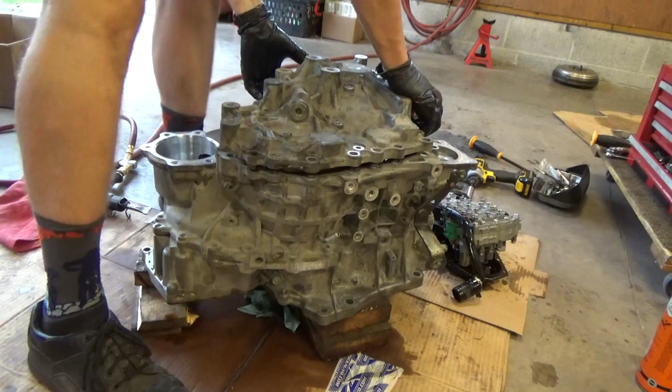That dowel is stubborn. Okay, should be in good shape. Now you'll probably lose some pieces, but don't really care, right?

Ho ho ho. That is freaking cool. This is what we came to see. That is freaking amazing. So it's not just a couple steel belts, it's a lot of them.

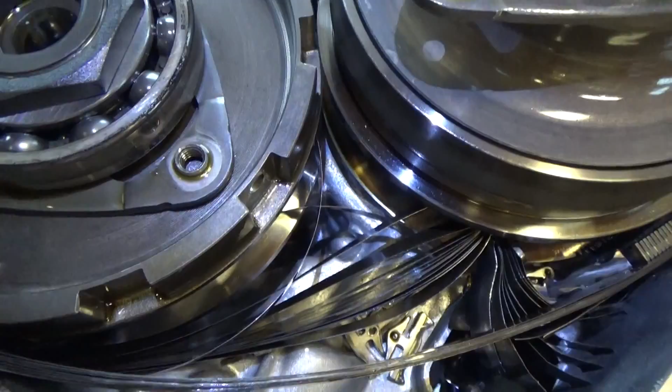So the screws that were in there actually, like I thought, were bearing retainers. These big roller bearings. They're just kind of plates.

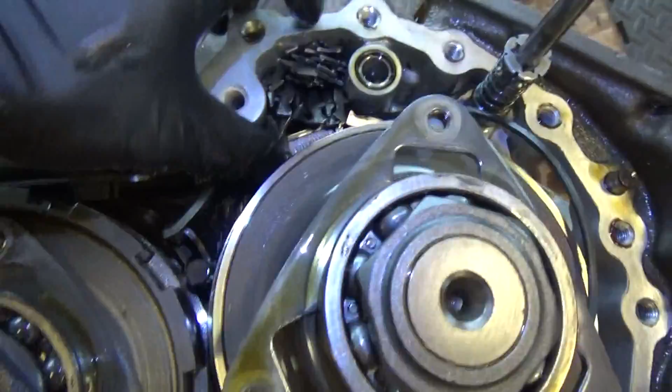We'll take this out. I wonder what this is, some kind of plastic piece. But wow, that sheared clean off right there.

I'm wondering if we clean everything out, if we can put a new belt on here, salvage this thing. Wouldn't that be pretty awesome? Now what I want to explore is the actual mechanism that varies these ratios. That would be really, really awesome to understand how this thing works.

Alright, time for some analysis here. First of all, I can't believe this thing made it 186,000 miles. All that torque is transmitted through these steel belts with these little segments sandwiched in between them. That is some really crazy engineering that they can make this thing actually work. I'm impressed, you know, you can't say that it's poor engineering. I mean, it did blow up, but the fact that it did go that far, yeah, that's impressive.

Now if you were towing a trailer with this or doing something heavy duty, I don't know, I would not trust this contraption. Or doing like a long cross-country trip into the middle of nowhere, towing a trailer up the Rocky Mountains or something.

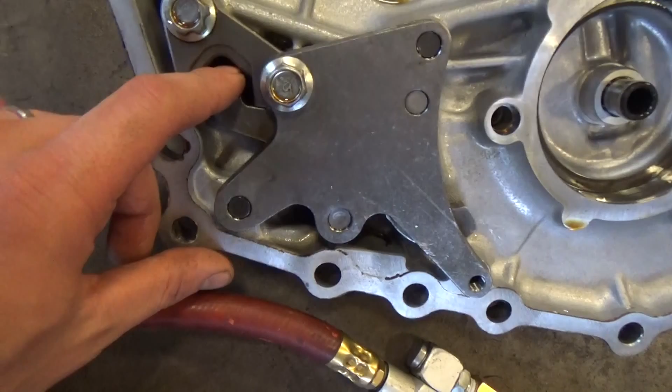So first, what is this thing? So when you put the vehicle in park, this comes all the way up. Now what does it push on? It pushes on this guy right here, kind of goes in here, and that extends this little pawl. And that engages into one of these teeth.

And this secondary pulley is actually directly attached to the final drive. And it's jamming up because the belt's freaking destroyed. So it looks like there's a direct connection between the secondary pulley and the final drive. So when that pawl engages, you're in park and the vehicle won't move. So that is our park pawl engagement mechanism. So we got that out of the way.

Now, how do these gear ratios vary? That's the heart of the CVT transmission. So maybe I'll clean up this mess a little bit here, and then we'll see how the heck these pulleys actually vary the gear ratio.

So now that we see the carnage in here, the question arises: was it the belt that failed? Well, obviously it failed, but did it fail just from wear and tear and fatigue, or did something actually cause it to fail? And to answer that question, we need to see how this transmission works, how the gear ratios vary, and what other failure could potentially cause this belt to get overstressed or stretched.

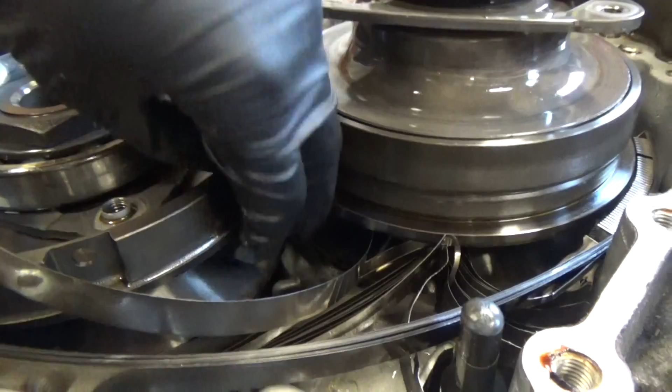You can actually tell a surprising amount about a system just by looking at it, observing it. So what do we see right here? We see these two pulleys, the primary pulley and the secondary pulley, and the belt rides in these grooves, kind of like double cones opposed. So these concentric pulleys, right?

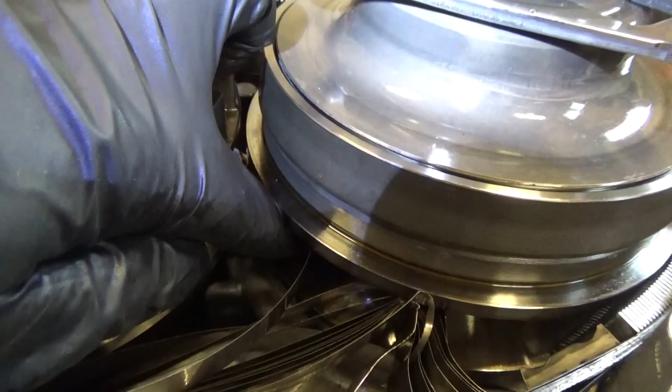For the gear ratio to vary - we'll draw this up on the whiteboard - but the belt has to ride either further in on the primary pulley or further in on the secondary pulley. And how do we get the belt to go further in? Well, these pulleys actually change the distance between these cones. So then it lets the belt slip further in, and at the same time the other pulley has to close the gap between the cones so the belt rides further out.

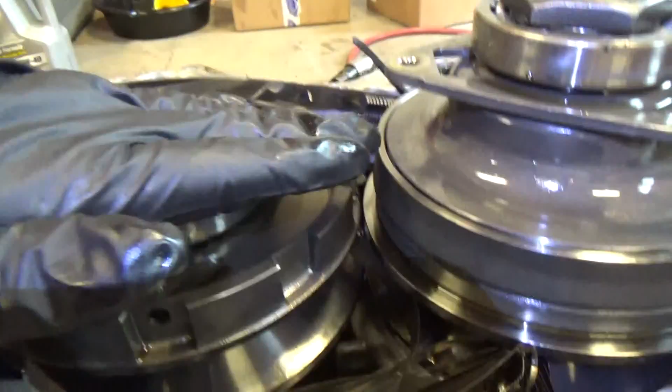So it looks like, for example, on the secondary pulley, this part is stationary with respect to the surface. However, the bottom part is the one that moves up and down. On the primary pulley, it's the opposite - I think the bottom surface stays stationary with respect to the transmission case, and this upper part moves in and out. Now, the reason I ask if one of the pulleys failed and caused the belt to rip, is because right here you see another part of carnage.

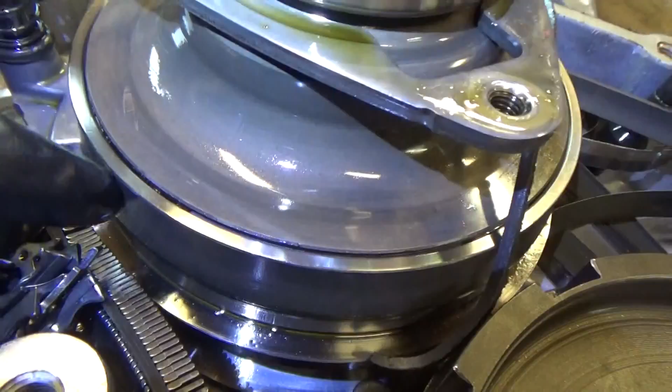What the heck is this thing? Well, if you look close, inside the gap right here, you can see the leftovers of this guy in between the drum and the, I don't know what you want to call it, the outside and the inside. So that is supposed to be a seal all the way around. And right there it stops, so apparently this seal just got blown out when this pulley collapsed.

Now, did it collapse because the belt ripped first? Or did the collapsing pulley overstretch the belt and cause the belt to rip? That, I'm afraid, we can't really answer.

All I know is that it's not just the belt that failed, it's also the seal that got destroyed. And the material of the seal, I don't know if it's supposed to be pliable rubber, but this feels really stiff. And if you bend it, it'll probably crack.

So, my question is, did the seal just get hardened over time from heat and lost its pliability and then just failed? The pressure got lost, the pulley collapsed, that pinched the belt and stretched it out and just ripped it. So it could be a failure of the pulley causing the belt to rip, or the belt ripping first, causing the pulley to collapse and blowing the seal. So what came first, the chicken or the egg?

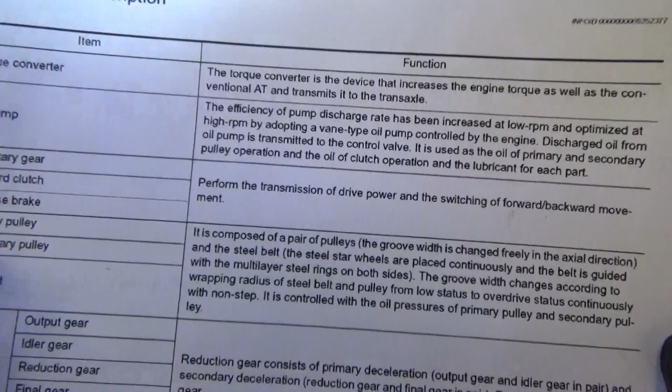So from all data in this component description, if we look at primary pulley, secondary pulley, steel belt, so read that little paragraph: composed of a pair of pulleys, the groove width is changed freely in the axial direction, and the steel belt, the steel star wheels are placed continuously, and the belt is guided with the multi-layer steel rings on both sides. Those are the bands that snapped.

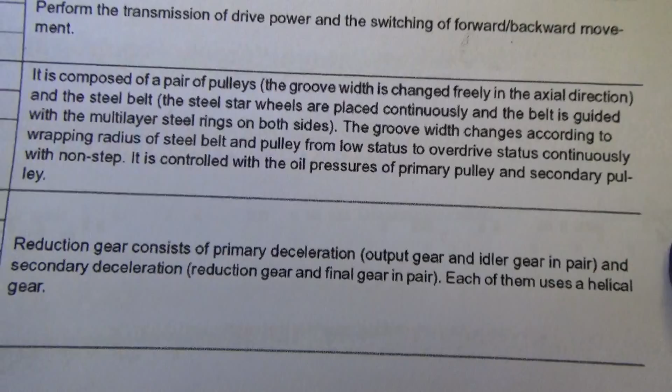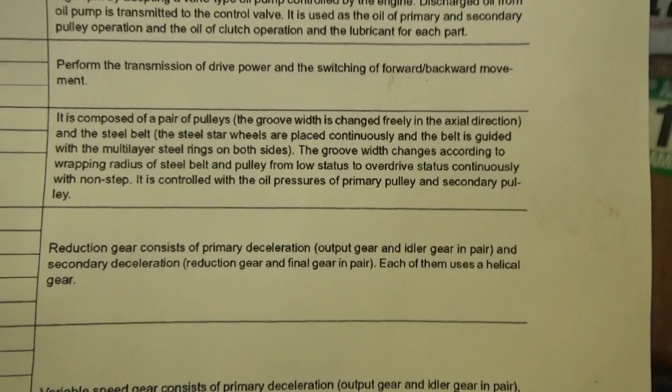The groove width changes according to wrapping radius of the steel belt and pulley from the low status to overdrive status, continuously with non-step. It is controlled with the oil pressures of primary pulley and secondary pulley. So, oil pressures are key here. So let's drop a little schematic on the whiteboard.

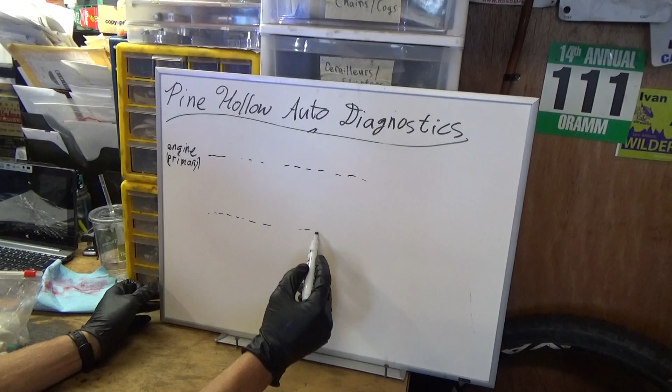So the principle here, we have two axes, primary and secondary. So let's just draw a dotted line. So this is going to be engine speed, or primary. And then our second axis is to the wheels, and this is secondary.

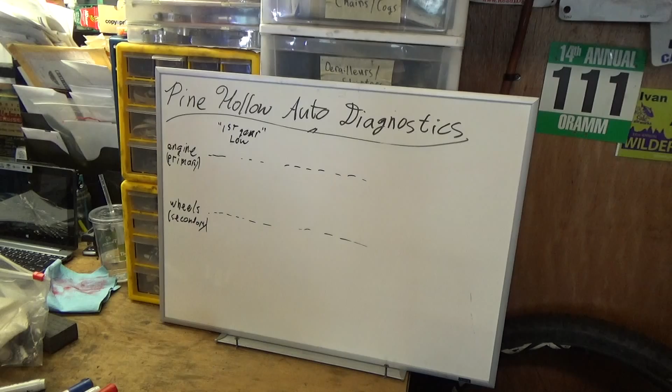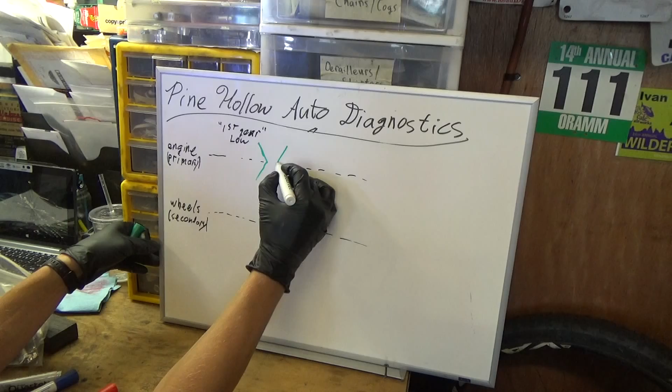So first let's draw the configuration for when you're just accelerating, this is like first gear, so low ratio. So in first gear, what happens? The engine spins fast and the wheels spin slow. And if you think about a bicycle, the pulley in the front is going to be small and the pulley in the back is going to be large to get that really low gear ratio. So the cone in the front is a small gear, right? So this cone is going to be spread out, and the cone in the back, again we need to line up our center marks, is going to be squeezed in.

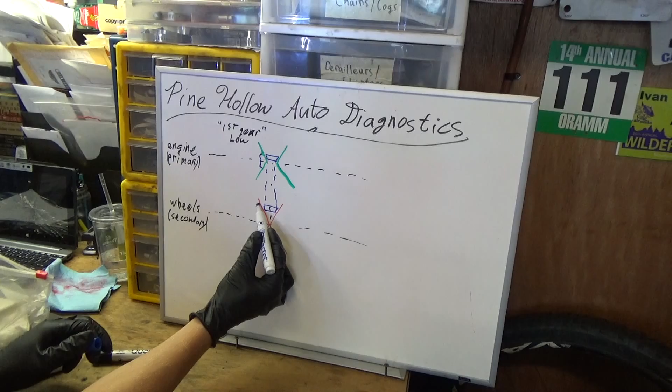Right? So then the belt, let's say the belt has this shape. If you bring that shape down here, it's actually going to ride up high on the secondary pulley. You see that? So the actual diameter on the primary side will be small, and the diameter on the secondary side will be large. So that's our first gear, or low gear.

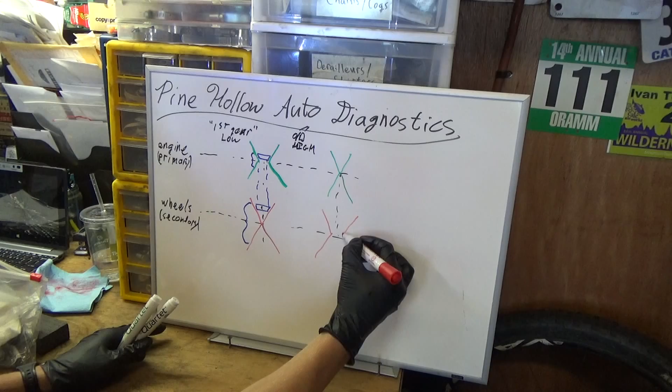Now as this CVT does its thing and these cones move in and out, once we get to high gear, so this is like overdrive or high, the primary pulley actually gets squeezed in, and keep drawing this line down here, our secondary pulley is actually going to come out. So now our belt will look something like this. It'll ride high on the primary side, and it'll be way down here on the secondary side.

So you can see that this distance got big and this distance got small. That's your high gear ratio. The engine's spinning here, and for every engine revolution you'll get a lot more secondary pulley revolutions, and your wheels will go faster for the same engine speed. So I think that's pretty neat.

The question is, if a pulley did collapse, which one was it? And since only one side moves, are these pulleys aligned at the moment?

So as we saw on our transmission, this side of the secondary pulley is fixed, just draw it as a triangle, and this side of the primary pulley is fixed.

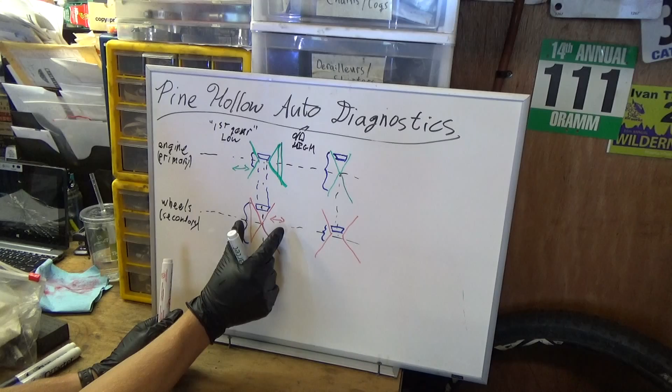So that means this guy can go in and out, and this guy on this side can go in and out. And keep in mind, the belt always has to maintain this straight direction. If this pulley gets squeezed in at the same time this pulley gets squeezed in, you're in big trouble. Because A, the belt will get stretched, and B, it'll actually get misaligned.

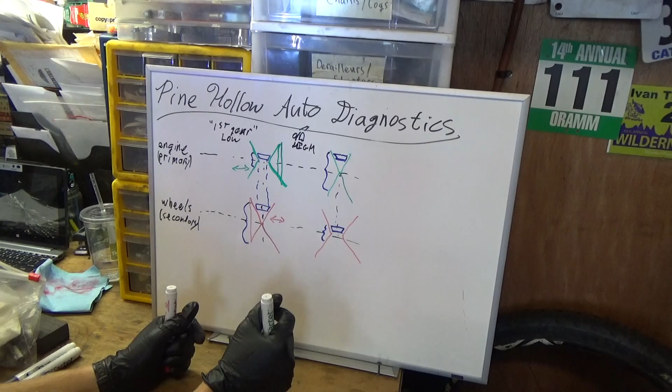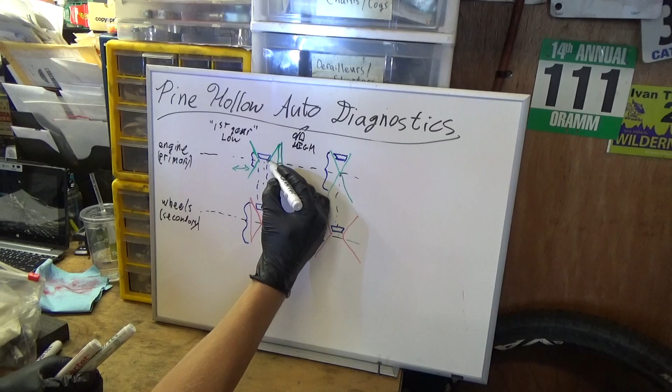So imagine this guy going in here and this guy going in here. That means our center line will now be from here to here, which is crooked.

So it's kind of a geometry puzzle how these pulleys work, but it seems like they're very sensitive to oil pressures. When this one closes in, this one has to come out at the same time. Otherwise, this transmission is just going to blow. So it's very, very sensitive.

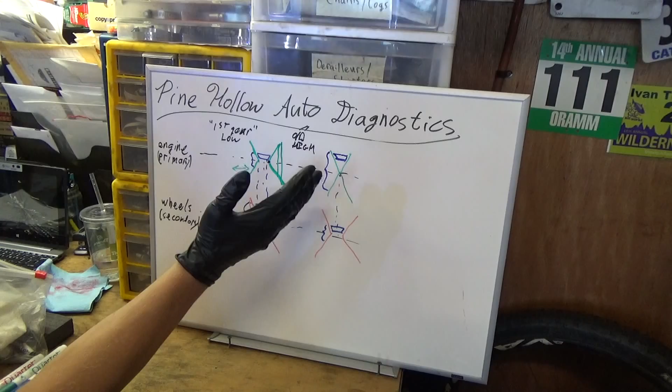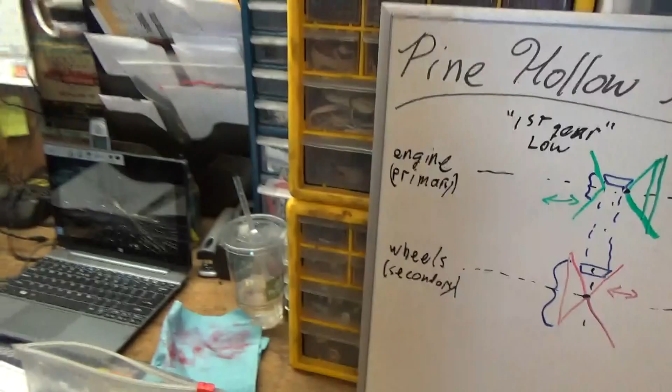Now the question is, did one of the seals fail and the pulley collapsed and just snapped the belt? Or did the snapping belt cause no feedback force when the pulley collapsed and blew the seal out? That we can't really answer, but at least we have a pretty good understanding of what it takes to vary these gears using just oil pressure on the sides of these conical pulleys.

So the next thing I want to do here is get the remains of this belt off and actually try to lift this big pulley out and explore how the cones move with respect to each other. Where the pressure is applied, what the default position is. Because right now, the pulleys, you can see, they're misaligned and the distance is equal between them, meaning they're both closed. Now I don't know if that's what they do normally or if that's part of the failure.

Quick little experiment. I got a pry bar in here against the remains of the belt. I'm trying to push the little segments back into the pulley, and check out what happens when I do that. When I push them in, come on.

The pulley actually expands and you can see oil coming out of that hole. And then I let it go, oil goes back in. So that bottom part of the pulley is going in and out.

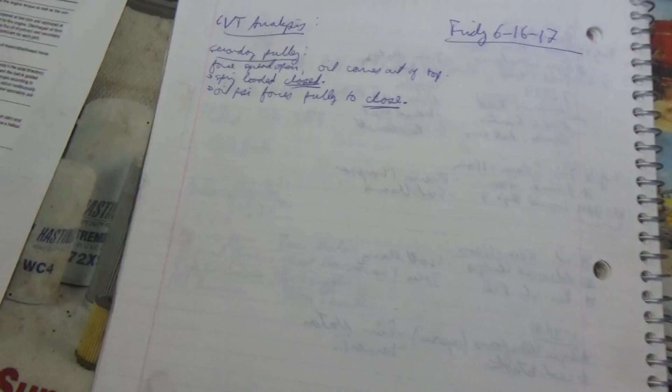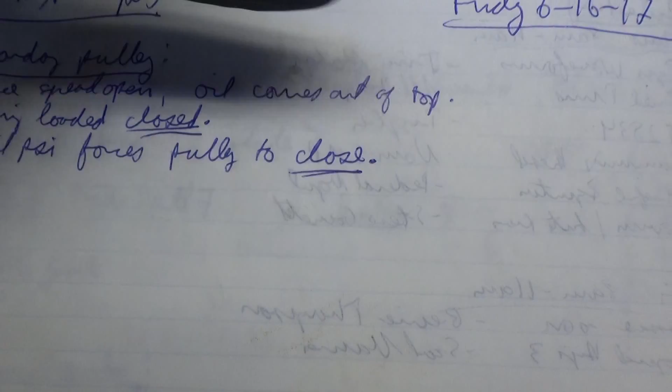So personally, I find this the most exciting part of any teardown is to actually figure out how the dang thing works. So in the secondary pulley, just taking some notes, when we force spread it open, oil comes out of the top. So it is spring loaded closed, and the oil pressure forces the pulley to close.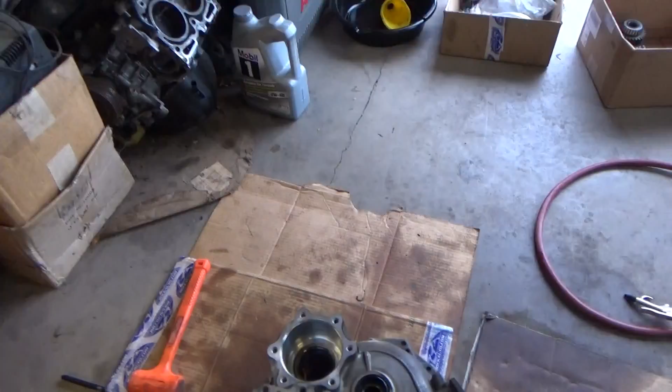If that makes sense. So this pulley is always pinching the belt tight under spring pressure. However, oil pressure actually forces it tighter to clamp the belt, and so there's no slip between the pulley and the belt. And assuming that this is the oil port for that drum, looking at our cover...

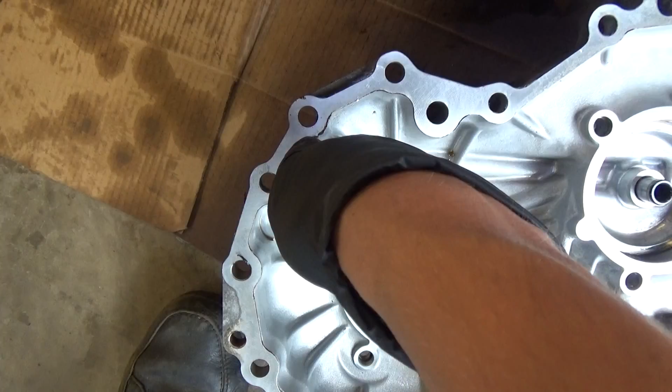You can see that this oil pressure port right here corresponds to this hole over here. And if we blow some compressed air into here, it comes out exactly out of this dowel to pressurize our secondary pulley.

That's really cool. So now we can see how the secondary pulley is controlled with oil pressure, and the primary pulley, I think it's the exact same principle, but it's controlled from the back side. And right now it's spring loaded closed, so this drum where the seal is actually rises up towards the bearing.

And you can actually see that there's a kind of like a little guide, but I think it's not a guide, it's more of a sensing rod that comes down here, and you see that pin moves up and down.

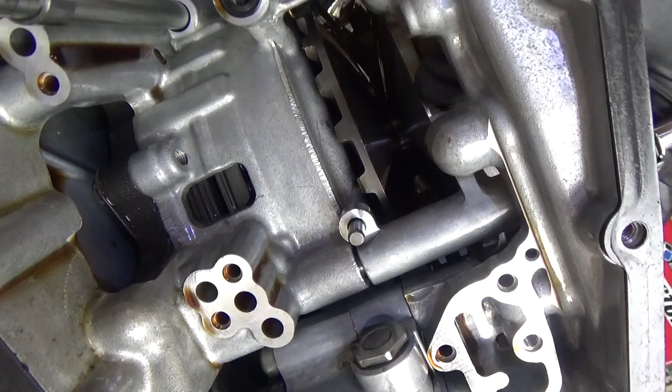So right now it's in the fully down, pinched closed position, but as that pulley diameter, the distance between the cones grows, this guy lifts up, and that corresponds to a little thing in the valve body.

Right in here, I think that pin goes right in here in this little arm, and that, again, we don't know the exact details, but there's an oil control valve here and an electric motor that retracts or extends this little arm.

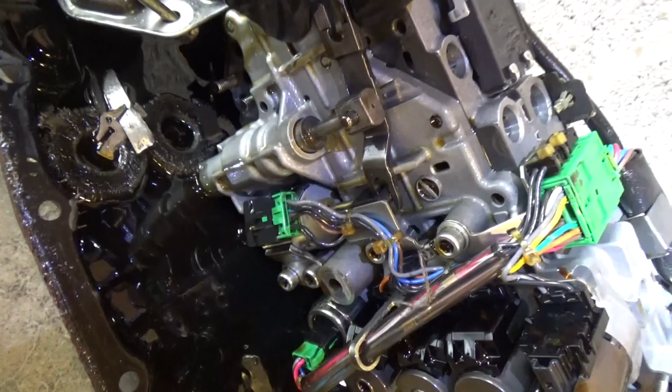So it has to account for all the variables. Where the primary pulley is, that probably feeds back to the secondary pulley to make sure it's synchronized.

And the motor, that might be the actual shift motor, to control the gear ratios. It's all like a mechanical feedback system, and obviously with electronic control. So this thing, on paper the concept's pretty simple, but the execution requires a lot of very precise engineering and control.

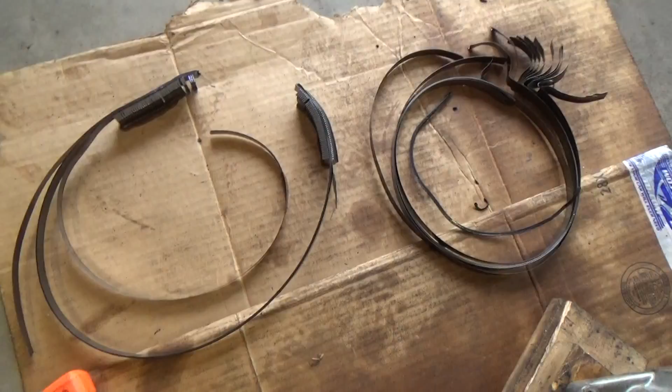So what I want to do is get these kibbles and bits out of here, and at least pull one of these pulleys and kind of see how it works. So it looks like in these CVTs, the most catastrophic thing that can happen is indeed this steel belt breaking. There's the remains of the two bands, or two sets of bands I should say. There's still some segments on those, and my magnet tray is overflowing with bits of steel belt. Now let's try pulling the secondary pulley out.

Oh my word. So there's that. Wow. Let me get some more bits out, and we can actually see what's going on in here. This is kind of fun, you're going fishing for kibbles and bits.

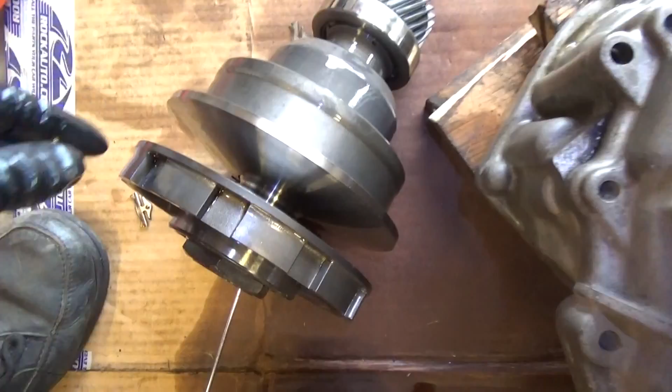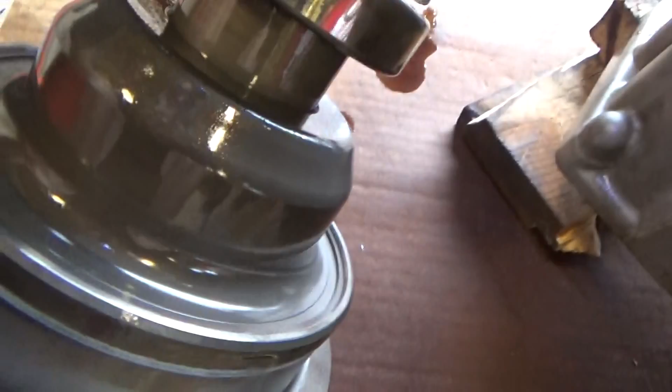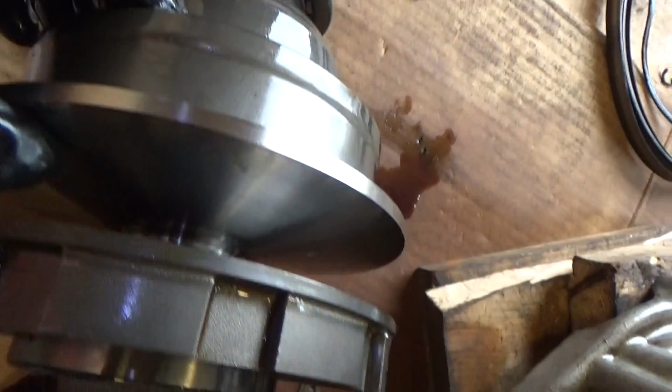And this secondary pulley is directly attached to this pinion gear, so that there's no other bearings in here. And aha, check this out, there's actually a snap ring holding this drum in place. So if you remember, when we spread this guy open, this part moves over here and this part stays stationary. You can actually see the where the gap is down there.

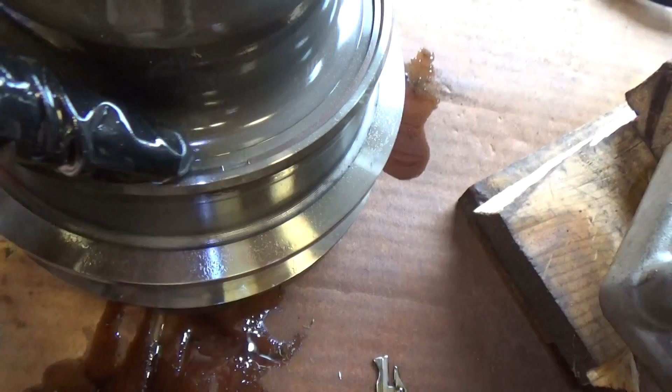So if maybe we lost a snap ring that goes around here, because the seal might have blown out because the snap ring went MIA. I don't know where it would have gone. Might have to look for that too.

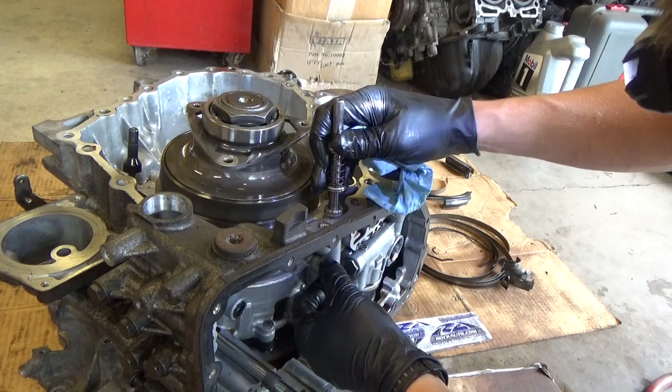Okay, next step, I'm going to attempt to pull this primary pulley out. And to do that, we need to take off this little guide mechanism. So the rod pulls out and this whole thing just slides out. So I'll keep that here. And let's see if this guy will just lift up out of here. Wow, it comes apart pretty easy, doesn't it?

I heard something jingling in there. So it looks like that speed sensor, I think it was still working as we saw the scan data. But man, oh man.

So let's explore this primary pulley. The teeth here are actually what the sensor reads. So that's our primary input shaft speed, or primary pulley speed, I guess. There are these big ball bearings. And there's definitely something in there that isn't supposed to be in there.

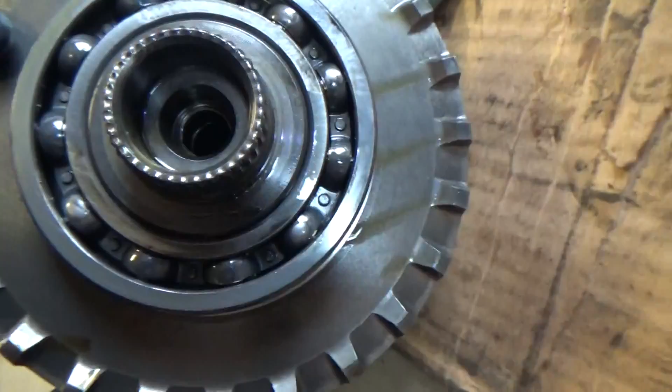And the way the oil gets in here, I assume it just comes in through this middle shaft, right through here. We can blow some compressed air down in here and see where the oil squirts out really gently. Don't get sprayed. Okay, this hole right here is our primary pulley oil pressure control. That comes straight from the valve body. And I made a nice mess of my floor again.

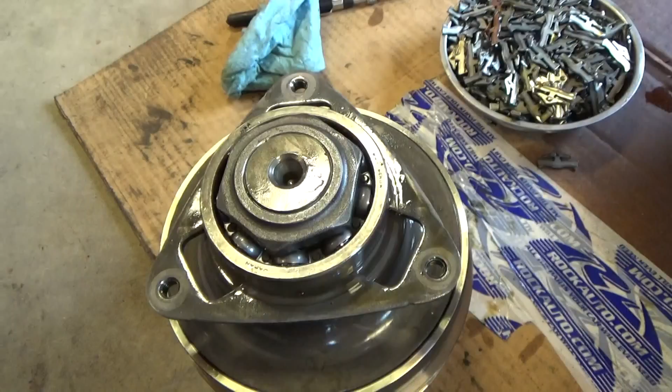So I'm curious to maybe take this pulley apart and see what went wrong, if we're missing a seal or what's jingling in there. That might be the last part of this teardown video because we're basically all the way down. The only thing we haven't torn down yet is this clutch pack in here. And that controls, I guess, the reverse mechanism too, because the reverse gear drives this whole thing backwards even though the engine's still spinning the right way.

So this is kind of similar to an automatic transmission, I think. The only thing that's different here is the forward gear ratios - that's the separate CVT specific mechanism.

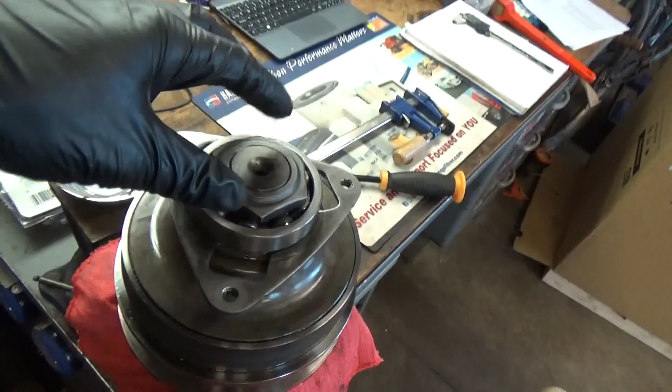I can't believe it, but I actually got this huge 55mm nut loose without the vise, because the vise can't open up far enough to hold this huge drum. So I put a big pry bar in one of the teeth down here, pried it up on boards, used a pipe wrench over here to grab the nut, popped it loose, all for the sake of figuring out what's wrong here. I mean, I could have just sent in the core already, but I'm just as curious as you guys are of what is hiding in this system.

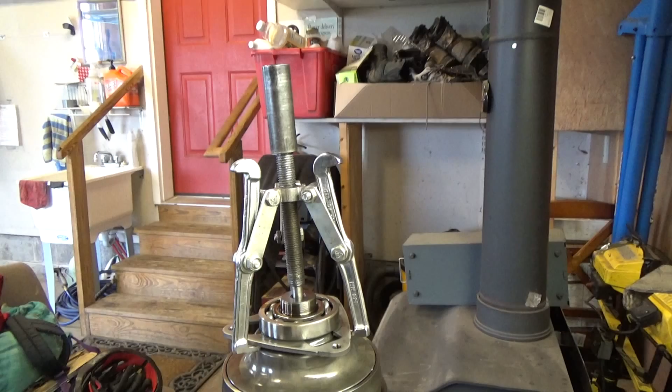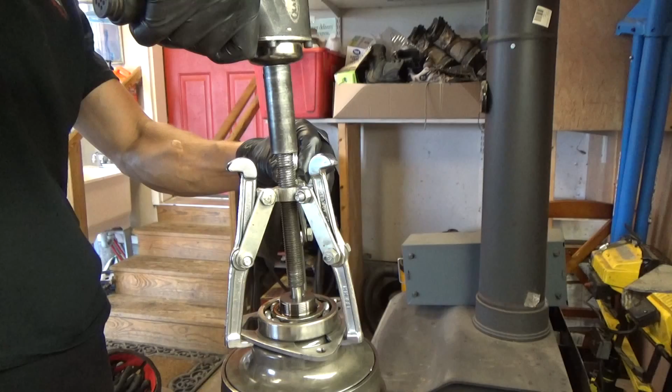I guess now we can support this guy with a vise and tap the shaft down, get this bearing off, and hopefully that'll free up this drum mechanism and get that to pop off too. So we're going to try the 3-jaw puller method to get this bearing off. That worked like a charm. No problem, I'm going to set that aside.

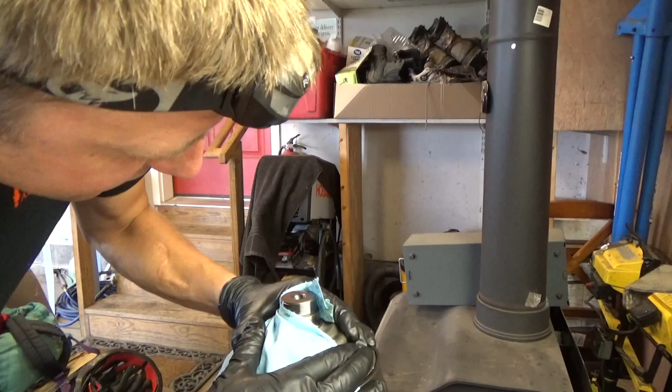Now what? Let's see if we even went the right way. Disassembly. My question is, does this big plate just pop out of here or what?

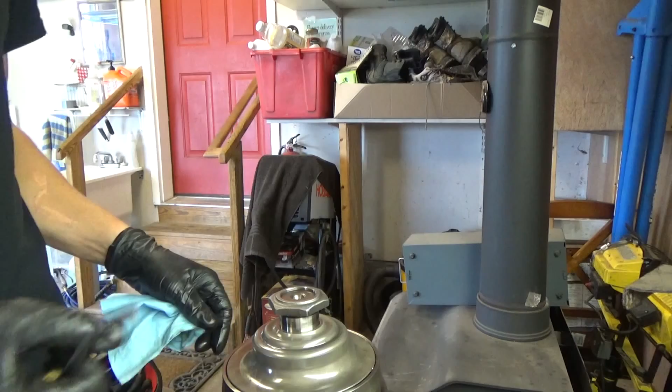It seems like it would. There's no more snap ring holding it in place. I don't know if we can pry at it. Just for safety, let me put this nut back on here just in case it's spring loaded and it's going to explode in my face. There are no instructions, we're just going by common sense approach here.

I mean, it has to come off. This part is stationary, and this pulley moves with respect to this guy. Oh, there goes my pry bar. I'm really not sure.

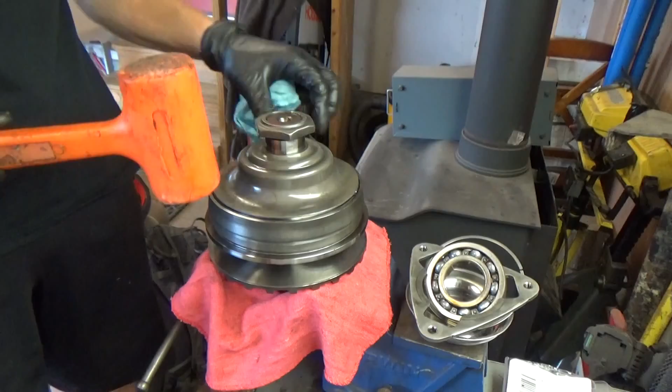Just for kicks, we're just banging on this plate with a plastic hammer. If it's under spring tension, maybe something will happen. Actually, it looks like that is coming up.

This is really, really, really cool. There's the rest of our seal. That may or may not be the root cause of the problem.

Now let's keep prying this baby out. You can always get under there. I don't want to damage anything I don't have to, because, like I said, I don't know if we've gone too far for the core return. I don't know if I can put this thing back together.

It's like empty, but we have these metal bits in here. I don't know where the heck those came from. That explains our rattling sound.

However, there's no groove for a circlip like we had on the secondary pulley. So this guy just kind of hangs out here, and you can see how this pulley actually slides in these grooves. There's a chunk missing there, I think. This is all scored up right there. This might be part of our problem.

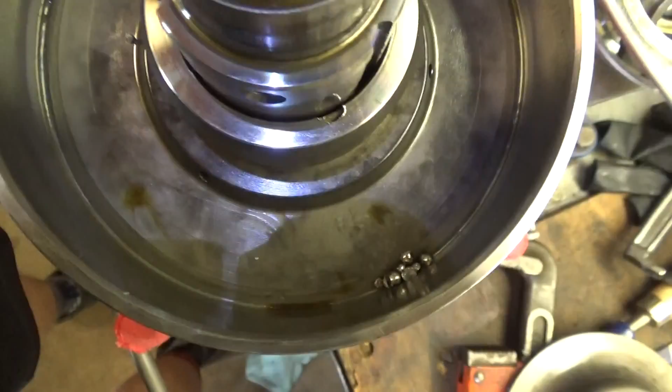What are all these little nibbins? Well, the closer you look, the more you understand. So, let's see, these grooves right here - 1, 2, 3, right? I think they're supposed to line up with these corresponding little half moons 1, 2, and 3.

So what happened was, this pulley, for one reason or another, actually rotated with respect to our shaft. It's not supposed to rotate, it's only supposed to slide up and down axially, but it actually rotated with respect to the shaft. It sheared off whatever goes in those little grooves - they might be little balls to keep this thing in line with the shaft here. So that's where all those little pieces came from. And there's a spring right there that keeps the balls from coming out of their respective holes.

So what I think we need to do is try to keep the shaft fixed and rotate this pulley back to its corresponding groove here. I'm not exactly sure if it's just supposed to slide up, because right now I think it's just jammed because it sheared those metal things in there, and they're jamming the pulley against the shaft. So if we can try to unjam it, turn it here, I think since these grooves are just free, this pulley should pull right off of here.

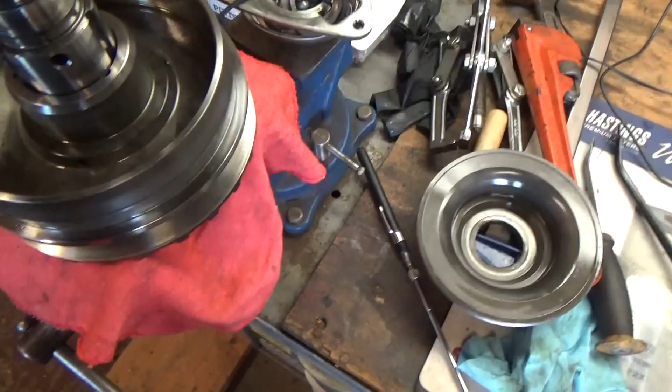So looking at the system, this dome is the actual oil pressure chamber. This thing fills up with oil through the holes, fed from the bottom, from the torque converter side. It gets filled up with oil and presses this pulley down against this pulley.

I guess it's a pretty simple system, but this wear pattern in these grooves, I think that's what killed us here, because that's not a catastrophic failure. That was gradual wear, and you can see where the ball stops. See how that's all chewed out, and up here it's fine. That's how far this pulley could extend.

So basically it almost looks like the metal is too soft or something, because the fluid is lubrication for everything here. It really is. But keep in mind, the entire power from the input shaft is going through this shaft and transferred to the pulley and to the belt to drive the secondary pulley. That huge torque is going on these little tiny balls, because if they weren't there, this pulley would just rotate with respect to the shaft. So even if you change your fluid, I don't think it's going to prevent this from happening.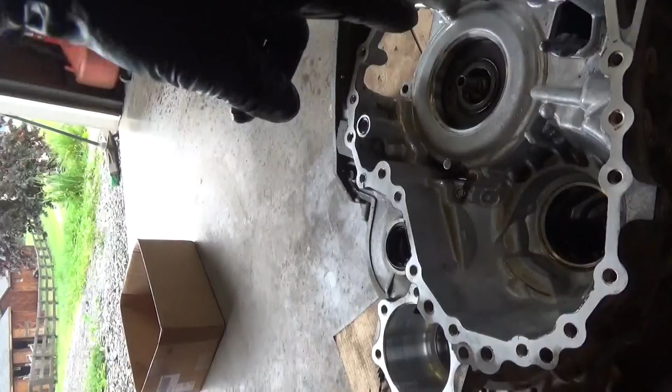You can even see on here that if you look down this groove, this side is more worn than this side. Would that make sense? So if you look at the transmission, the engine is spinning clockwise, right? So this shaft is spinning that way. I guess if you look from this side, it's counterclockwise. So keep that in mind.

Same thing here - this shaft is spinning counterclockwise, and the ball would actually be jammed to this side and spinning the pulley the same way. So absolutely that makes sense, this side is more worn out. Same with this side, it's all symmetrical - this side's worn out. Same here.

So that is how the CVT fails, and I assume that this is unavoidable. Even if you have the best lubricant, the pressure on that ball is just so great, and it goes this way, and it transfers an immense amount of torque from the engine to this pulley. That is crazy, but I think it's just inherent in the design.

They should make these grooves bigger, put bigger balls in there, maybe more balls, to distribute this extreme torque. I can't imagine what would happen if you're towing with this thing in the city - it probably wouldn't even last 100,000 miles.

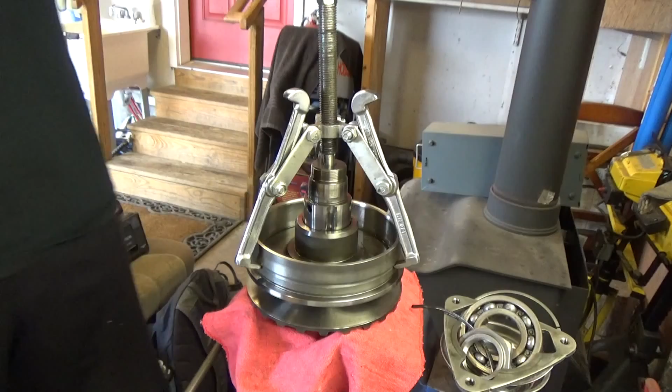So we're gonna try our best to get this pulley off, but that should be it. We can also use the same 3-jaw puller, try to get this drum off. Let's put it on the low setting, see what happens.

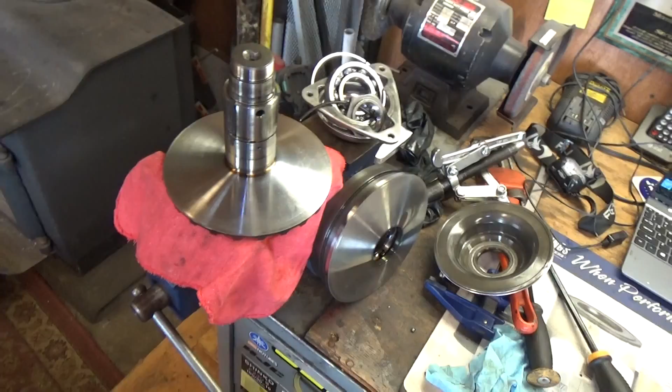Alright, so inside the pulley we can see more little sheared pieces of whatever is supposed to keep it from turning. There - little nuggets.

And looking at these grooves on the pulley, actually they look fine, they don't look worn out at all. See that one? No problems. But as we look on the shaft, there's where the problem lies. Boom, that guy is chewed up.

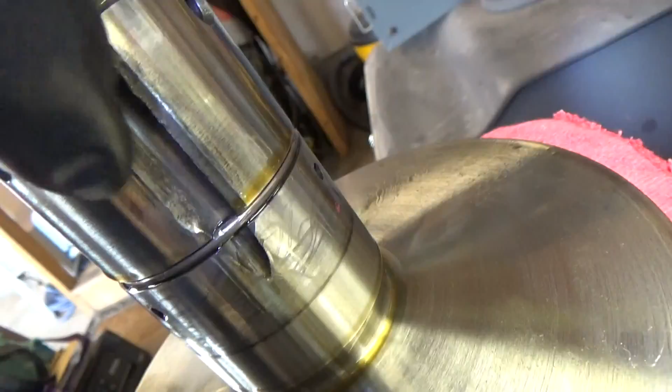So that was long-term wear, and eventually those little nuggets had enough and exploded. This one's really bad. Wear on the shaft - this guy is just kind of wiped. Yikes.

So I would say this is an inherent materials flaw and design flaw - the metal on the shaft is a lot softer, it seems, than on this pulley, and that's it, that's what happens. Something wears out. It's not a lubrication issue, this is just overload of these bearings. So it's not rated for this amount of torque, this many miles, I guess. See, that metal is just like sandwiched.

Yep, so hopefully they redesigned some of this to last longer, but you never know until you take the next one apart. But I think we'll wrap it up here.

I don't know if I can put this thing back together and get my core charge back, because if they see that everything's been torn apart, this is pretty much junk. They need to replace this, replace the whole pulley set, replace the belt. I guess the valve body might still be good. So for the reman process, I don't know what parts they keep, what parts they reuse, and what gets renewed.

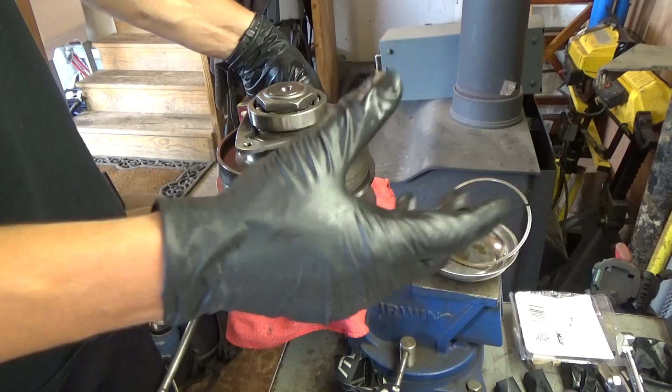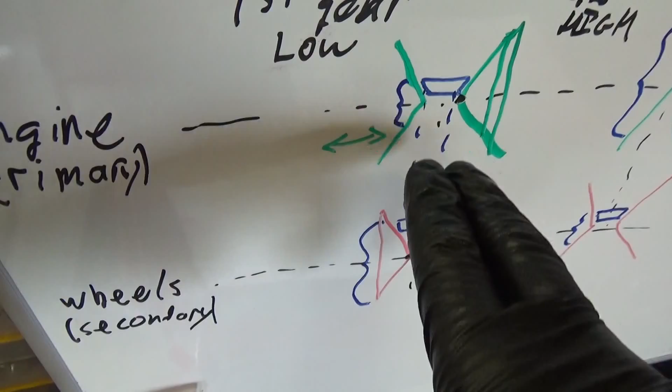The secondary pulley squeezes the belt, so we get to this scenario here. This squeezes together, the belt rides up, and then there's no pressure here, so these pulleys spread apart. And what ratio do we get? We get first gear, or low ratio. So that's kind of the default. When you start the car, you're in low gear, like you want to be.

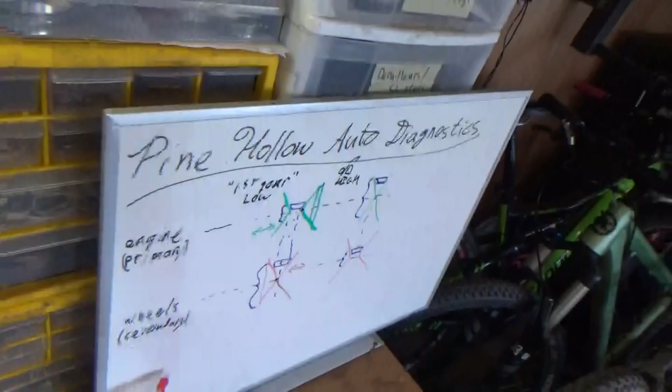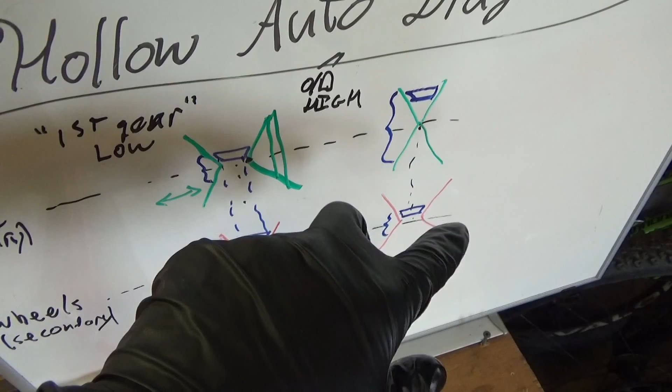And then as you accelerate, the pressure gets fed in by the valve body through here, and this thing starts to squeeze the belt and come down. So gradually we transfer to this scenario right here. The primary pulley squeezes the belt, it starts riding up higher and higher, and the secondary, I assume, lets go of the pressure, and the pulleys actually spread apart. The belt spreads apart those internal springs, and we get to this overdrive or highway high speed.

So not too bad of an analysis, I think, without having any real direction or instructions. Just observing how the system's put together, we can get a very good idea of how it works. So that's all I wanted to point out here.

So I got the pulley set back in place. This is the secondary that spins our drive gears, and our primary. Now I'm wondering if I should stuff this old belt back in here and sprinkle this whole mess around, just so it looks like we weren't even in here. I'll think about that. This drive belt here, really a feat of engineering.

And these plates, so this thing can bend and flex. I think that's kind of amazing that this whole thing just keeps going and going and going for miles and miles and miles. So the engineers did their homework on the belt, I think. That was not our original problem. Not at all. So those pulleys are always supposed to be aligned, and if one pulley moves with respect to the other, this whole belt gets torqued, and that's where our issue came from.

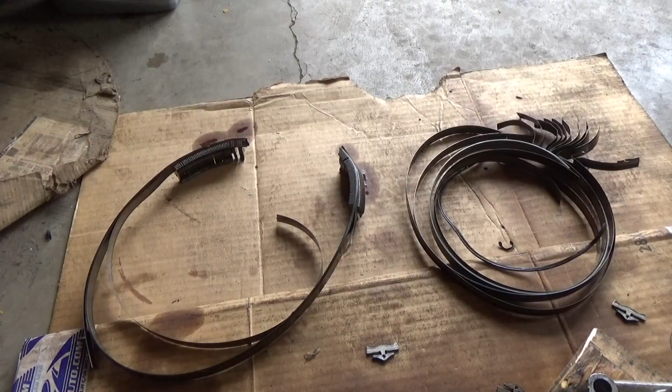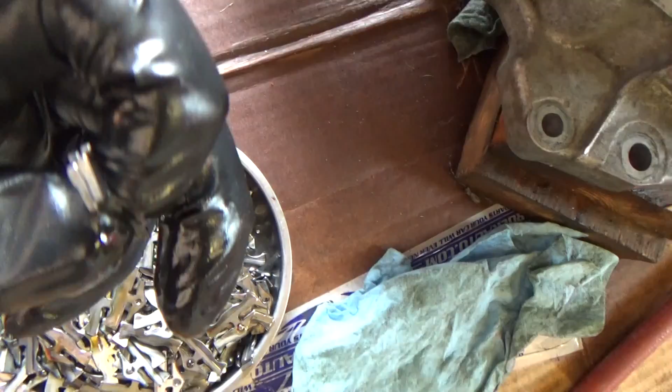But again, who wants to guess how many pieces there are in here? They have little locating pins, and the shape of them is actually designed so they can flex like that and go around and then straighten back out. Neat stuff.

I almost feel bad doing this, but we gotta put this back in there. Oh boy. Hope it fits. Sprinkle, sprinkle.

Maybe I should give these out as souvenirs. The CVT Teardown special.